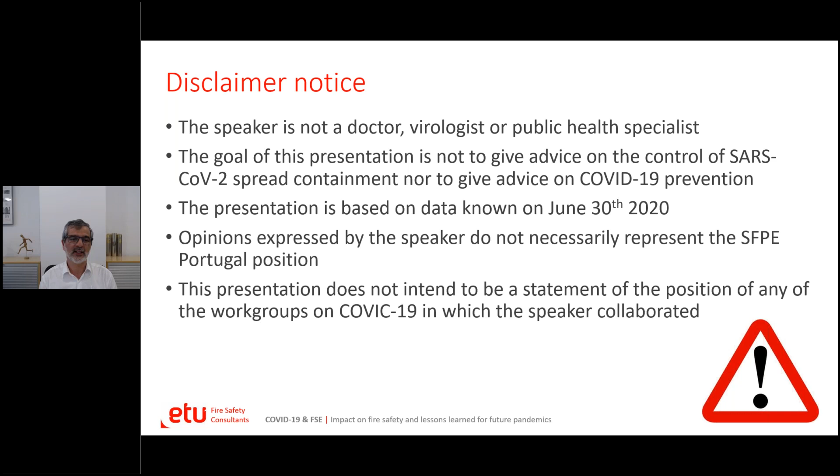So I'm going to start with a very boring disclaimer notice. I am not a doctor, nor virologist or public health specialist. My goal is not to give advice on the control of COVID or prevention of COVID disease. This presentation is based on data collected until 30th of June, so 6 days ago. And the opinions that I express in this presentation are my own. They do not necessarily represent SFPE Portugal's position, nor do I intend to be spokesman of any of the work groups in which I collaborated about COVID-19.

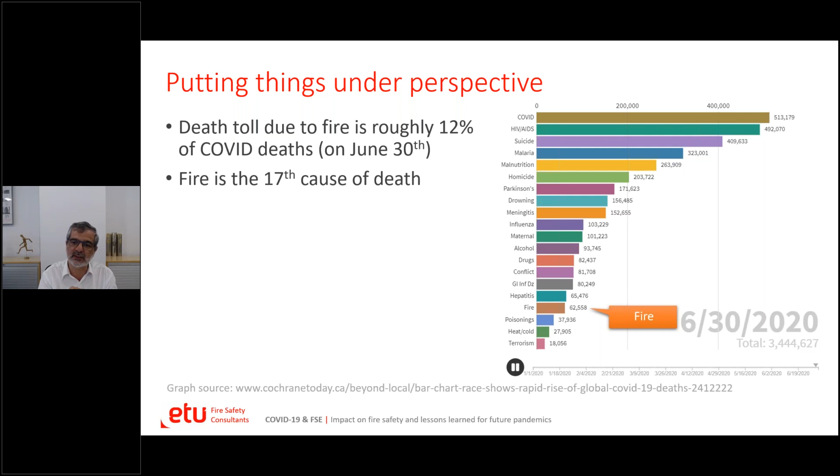So with that being said, I'm going to start trying to put things under perspective and to see how serious fire is comparing to COVID. This is a graph with the number of deaths since the beginning of the year until June 30. And we can see that fire has caused so far 62,000 deaths and COVID more than 500,000. So it means 12% of the deaths comparing with COVID.

But the thing is, eventually this simple comparison could make us neglect fire safety during pandemics, but one must take into account that the only metric to compare something that is bad is not only the death toll, it's also important to take into account other problems like property loss, etc. And anyway, I think that's a goal for all of us. No one wants the number of deaths due to fires to increase during a pandemic; it is just to add another problem to the equation.

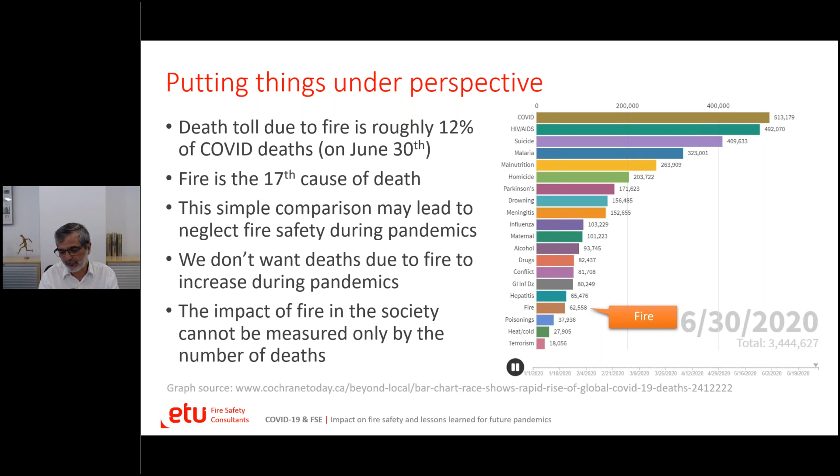I also participated in an SFPE European chapter leadership meeting that we scheduled just to discuss the impact of COVID in Europe and to share our experience from different countries, since we lived this very differently from country to country. So this was also very important for preparing this presentation. And we also had in Portugal a webinar, to be more precise, to discuss the impact of COVID in firefighting. We had a lot of webinars about COVID, but this one seems worth mentioning. And part of what I'm going to present is a result of clients' consultancy and listening to their concerns, and I'm going to show two stories about problems that my clients phoned me about.

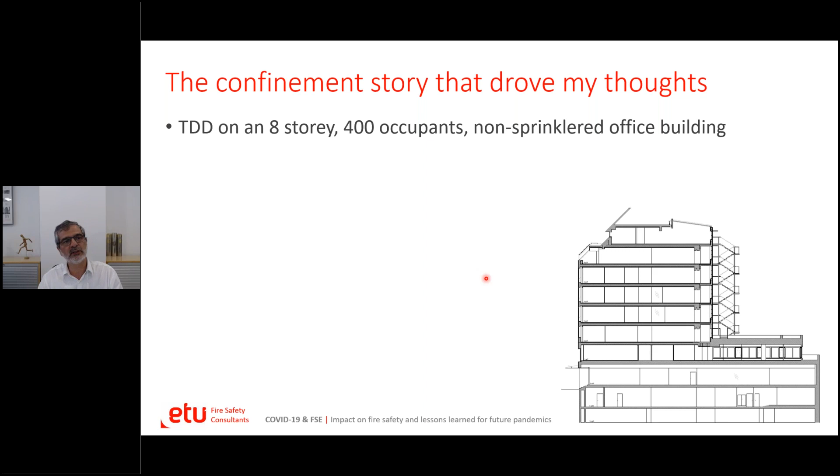The second story is during the confinement. I went to visit a building. You can see here the cross section of this building. I went to make a technical visit for technical due diligence in an 8-story building, 400 occupants, non-sprinkler office building. And at that time, during confinement, there was a very low occupancy load. Just 10% of the employees were there. All others were home working or remote working, as you prefer to say.

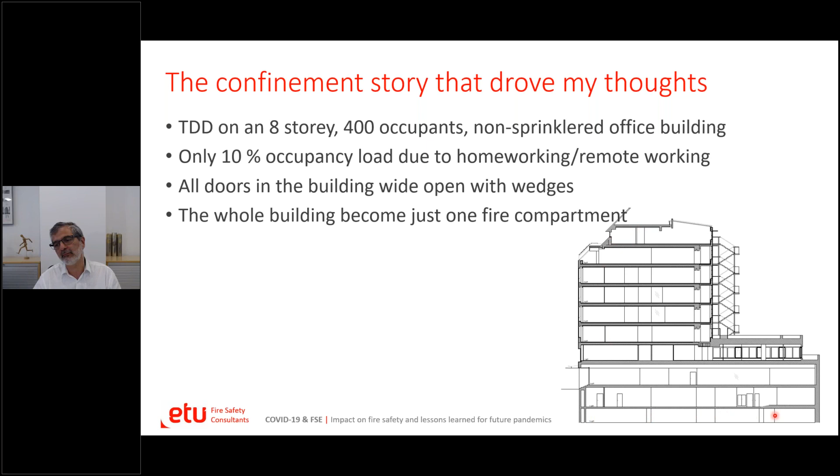But the thing is, all doors in the building from basement to top were wide open with wedges in all doors. So the whole building became just one fire compartment, a huge fire compartment. And if we had a fire in the basement, the smoke would spread to the last floor through the stairwell. So it would use the evacuation route as a channel for smoke, as a chimney.

This open-air outside stair will enter the building and will leave here. So just one fire in the basement could put at risk all people, all occupants in the building, and would block all evacuation routes because all doors had wedges.

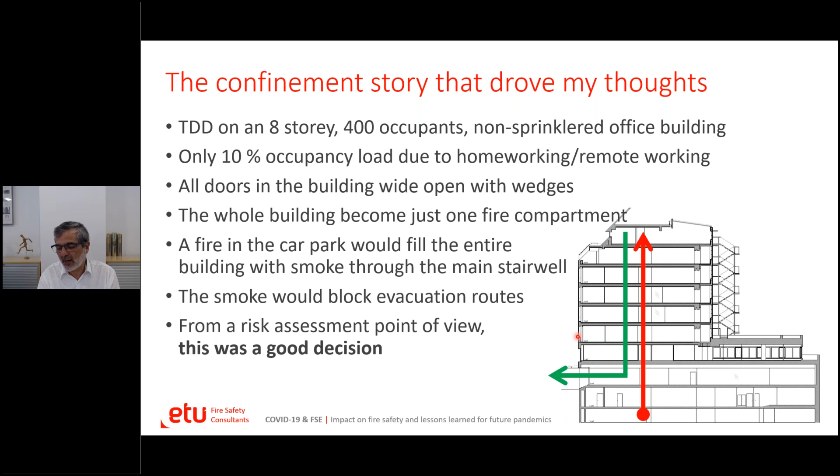But the thing is, and this is very interesting, from a risk assessment point of view, this was a good decision. And why is that? Because when we make a risk assessment, in a very rough definition, risk is, and we all know this, a product of the severity by the probability. And at that time, the probability of dying from COVID in Portugal was 10 times higher than dying due to a fire. And since the death toll is still counting, today the probability of dying of COVID is 40 times higher than dying from a fire.

But on the other hand, if there was a fire in the building, imagine 50% casualties in the building, so 20 people could have died in that fire due to wedges in all doors, which, taking into account that the average number of fire deaths in Portugal is 40 people per year, just one fire could increase the total yearly death toll by 50%.

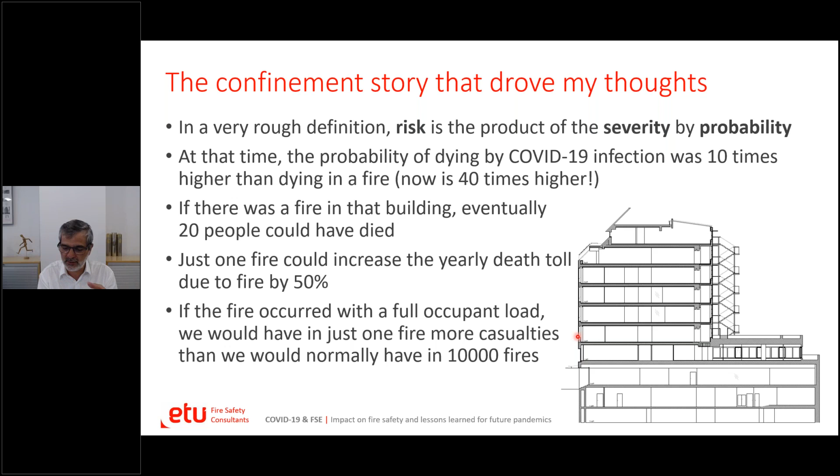And imagine that this fire occurred with full occupancy of the building, and we would expect more than 40 casualties in this situation with all doors wide open with wedges. This would mean that just one fire would have as many deaths as 10,000 fires in Portugal, which is more or less the average number of fires we have in Portugal per year. So this made me think that this is a problem that we must look into very carefully.

And once again, talking a little bit about risk assessment, this is a conceptual definition that I use when I'm lecturing courses about risk assessment. I like to use this definition in my classes. Risk assessment is a way to predict the future by looking into the past. And the trick is we tend to look at the past as something that doesn't change. It's a very common expression: it's impossible to change the past. Everyone has said this at least once.

However, the past is always changing. In fact, one of the definitions of the present is the continuous change of the past. This may seem too philosophical for fire safety engineering, but it's a very important concept. When a black swan like COVID appears, we are forced to speculate about the likelihood of this event repeating in the future. So putting this in more engineering wording, if there is an event with a very high severity, like COVID, we must make the assessment of its probability, as simple as that.

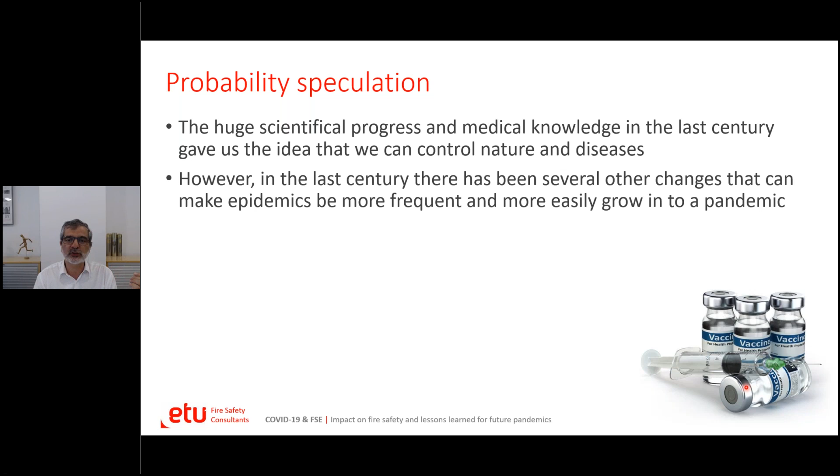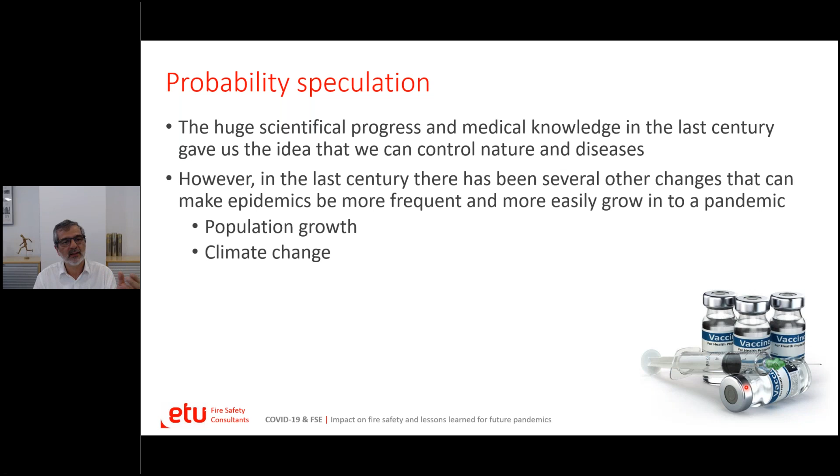But if we look carefully to this last 100 years, we can see that at the same time that we had a lot of progress on medicine and medical care, we also changed so many things in our lives that can facilitate a pandemic that, well, eventually we are not as safe as we thought. So population growth is one of them. I'm going to talk a little bit in more detail of all these topics. Climate change and transport and globalization.

So when we look to the graph of population growth, this is the last 2 centuries, and you can see that in a century we didn't grow that much, but in the last 100 years, from 1920 to 2020, we went from 1.9 to 7.6 billion. So it's a huge increase of population. This means more cities closer to each other, cities with higher population density, so it becomes easier to spread disease. We have megacities with more than 10 million, and they tripled in the last 3 decades. And this creates a sort of population continuum that facilitates the spread of diseases.

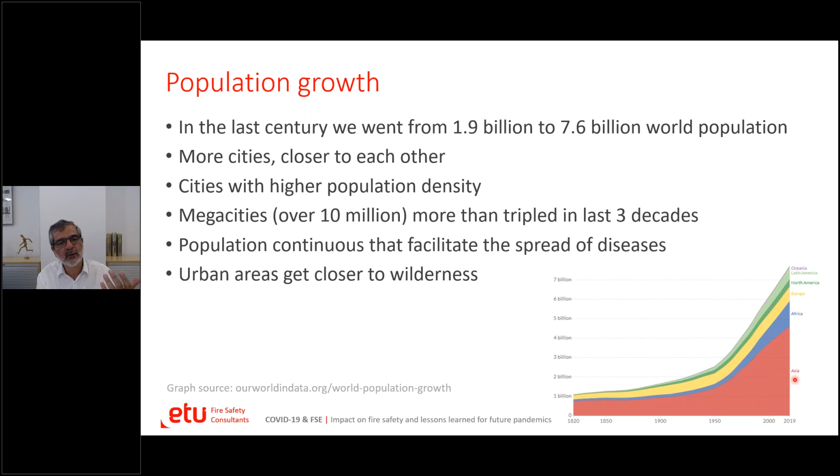And this is interesting to look at as well. There are some regions in the world in which the population growth is much higher. So eventually, from this point of view, we can expect, and if we look to the last pandemics, and I'm going to list them afterwards, they come from the regions in which we had the biggest population growth. And another side effect is that urban areas get closer to the wilderness, so we are more exposed to wildlife.

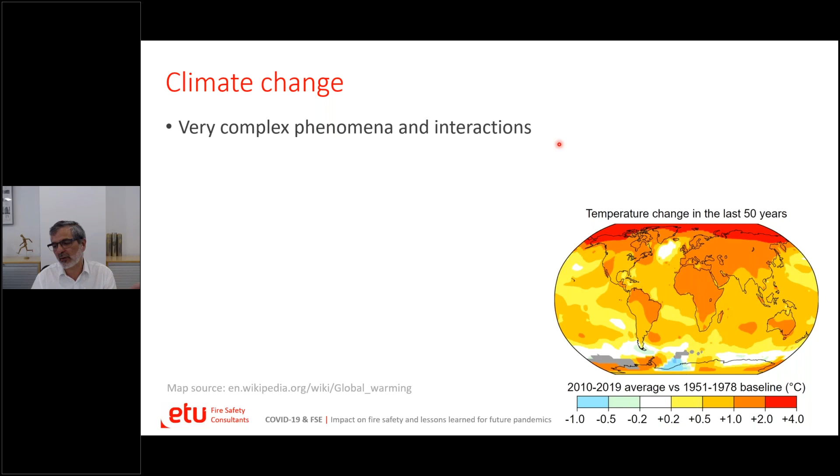Concerning climate change, this map shows the average temperature increase in the last 50 years. So you can see here the increase of temperatures, and most of the world has been affected by this. This is a very complex phenomenon. It has a lot of interaction. I'm going just to name some very simple ones. Shrinking habitats that make wild animals get closer to urban areas in search of food. Lower food resources make humans look into wild animals as an alternative food source, and we see that a lot in Asia.

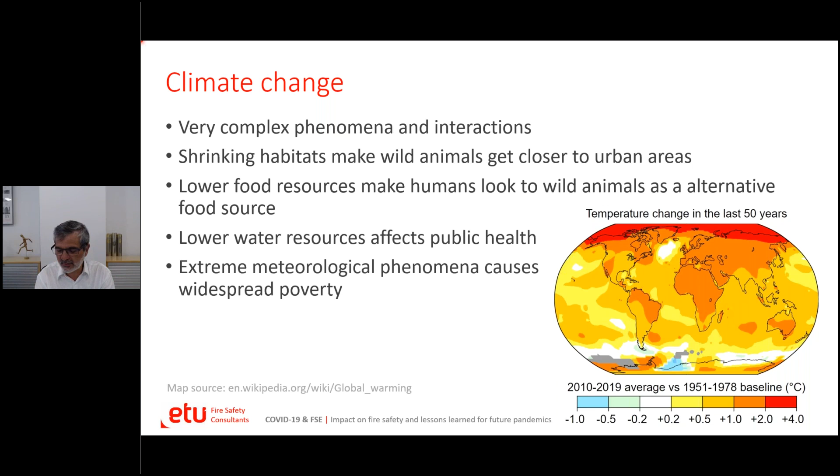Shortened water supply affects public health and the hygiene of people and communities, which facilitates the spread of disease. Also, these extreme meteorological phenomena can cause generalized poverty and very strong wildland fires. So all these effects can facilitate the spread of diseases. And on top of that, we have much better transports, and we have globalization that has very interesting, good economic effects and knowledge effects, but it has a dark side as well.

So nowadays in large cities, public transports are overcrowded, so this can rapidly scale a small cluster infection to a community transmission. Modern transports like cars, trains, etc., make it easier to travel from town to town or to different neighboring countries. So we can scale up very easily community transmission to epidemic level, and cheaper flights and more frequent flights can scale up the epidemic into a pandemic. And then we have the perfect storm like COVID.

So all this put together, this was what we had like a century ago: difficult animal-human transmission. Wild animals were apart from humans. Transmission between communities was very low, the transports were slow, so it could take days to go from one city to the other, so people would die before reaching the other city. Lower transmission inside the community because you had lower density cities, so people were not so exposed to each other.

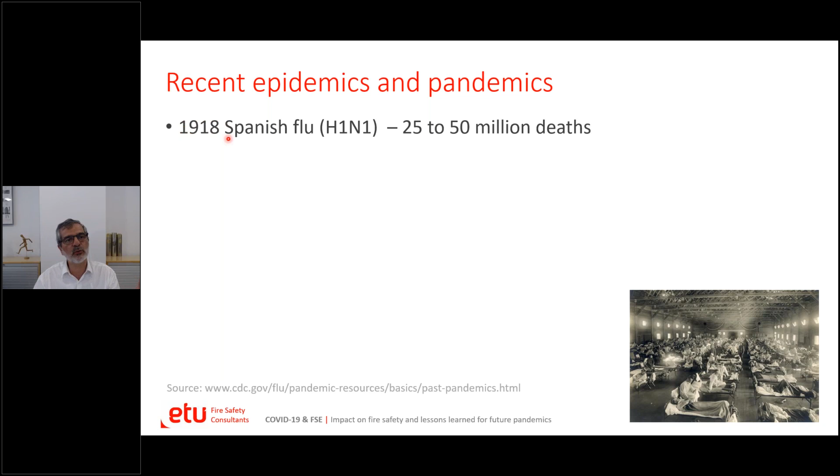So Spanish flu caused a lot of deaths. Well, this is a rough estimate, 50 million, but you must take into account that this was before antibiotics were discovered, and this was just after the First World War, so it was a very good environment for such a death toll. But then we had Asian flu, more than 1 million deaths, Hong Kong flu, 1 million deaths. So this was the past century, 20th century, and in the 21st, the SARS-CoV epidemic, that was pretty much localized, so just 8,000 deaths.

Then we have the H1N1 pandemic, 500,000 deaths. Well, this is the estimate of CDC; there are higher numbers than this estimate. So then we had the MERS pandemic, or epidemic, to be more precise. The gray ones are epidemics, the black ones are pandemics, okay? And then we have COVID, more than 500,000 and still counting.

So we had in just 20 years 4 pandemics or epidemics. This is not one for every 5 years because the first one was in the early years of the 21st century. But you can see that there are, on average, 7 years between each of these pandemics or epidemics.

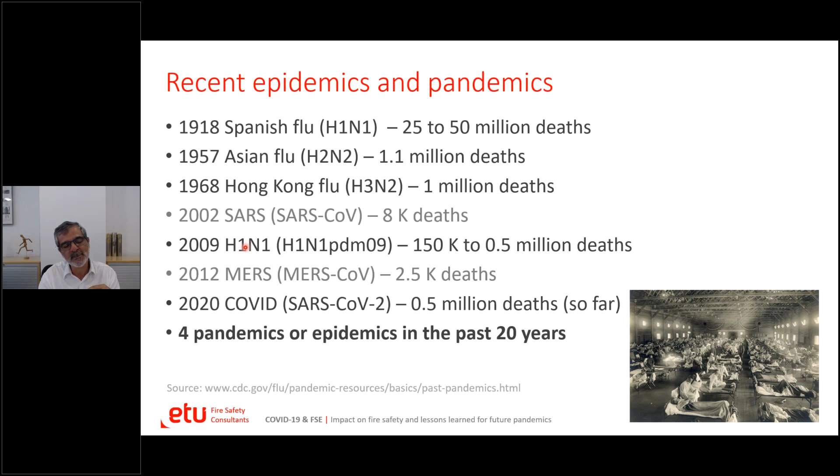And we also must, when we analyze this situation, understand how viruses spread. There is direct contact with body fluids, like hepatitis or AIDS; indirect contact, small droplets on objects or furniture that we touch and then take to the eyes, nose or mouth; and direct contact with airborne virus particles that are in the air.

So the containment measures will vary depending on the type of contagion. For direct contact with body fluids: self-awareness, change of habits, protection devices like condoms. For indirect contacts, we have hand hygiene, surface disinfection, respiratory masks, just to avoid touching the nose and the mouth.

But when we have an airborne virus, then we have to have the full package. We must have social distancing, respiratory masks, home working, lockdowns that may impact movement of people and transports. We have confinement. So the impact on fire safety will also vary a lot depending on these measures.

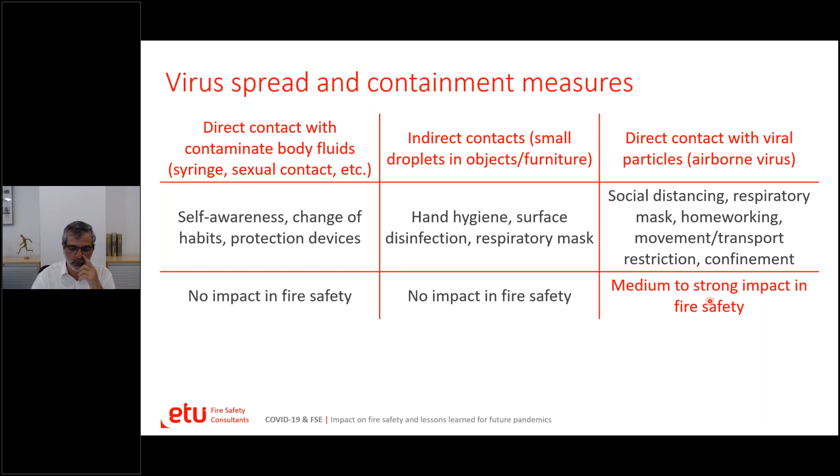So I would say in the first two cases, there is no impact on fire safety. But in a pandemic like COVID, we have a medium to strong impact, and I'm going to talk about it in the next slides. I tried to summarize and put in different boxes all types of consequences that I came up with. We have temporary changes in the built environment, changes in our way of living, like social distancing and home working, maintenance restrictions, firefighting restrictions, and I'm going to look at all of them.

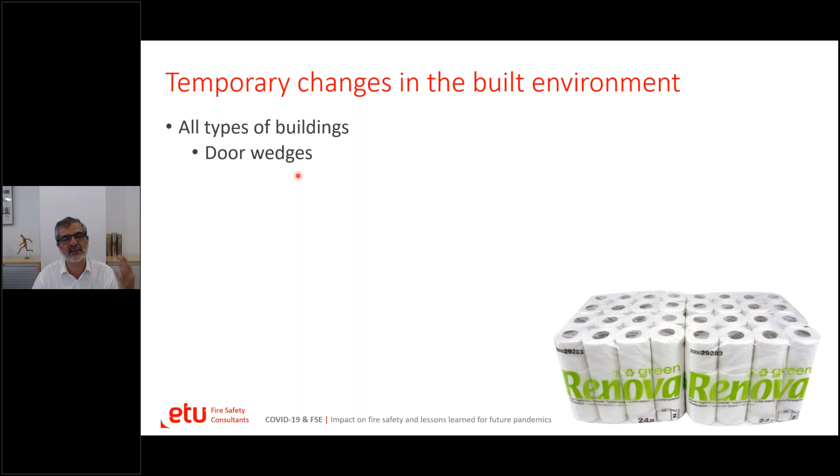Within the changes in the built environment, there are several types. Some apply to all types of buildings: door wedges, fire load increase. This is an example of fire load increase, an image we all have from the media at the beginning of COVID, the rush for toilet paper.

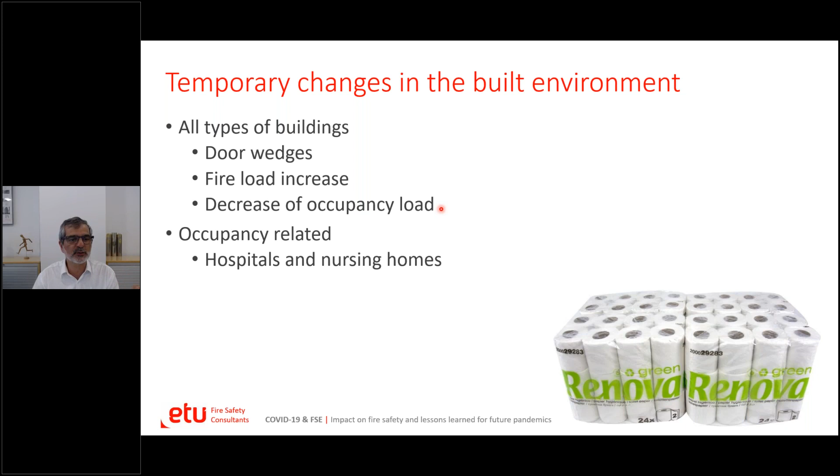But we also have a decrease in occupancy load in most buildings, which can be considered good in an ASET/RSET analysis. We also have some occupancy-related ones, and I'm listing just the more relevant: hospitals and nursing homes, commercial buildings, industrial buildings. The most obvious problem with door wedges is fire compartmentation if it is a fire-rated door, and I already mentioned this in the example I gave in the beginning.

But this is not the only problem. It also jeopardizes smoke control effectiveness, not only in stairwells and pressurization systems, but also in large areas with external doors if you hold them open. And this can jeopardize the effectiveness of pressurization smoke control systems.

And of course, there is also an advantage to having wedges on doors. It makes evacuation faster because it doesn't require door negotiation. But, as I'm going to talk about in the next slides, this doesn't really have a strong positive impact on total evacuation time.

We have problems related to fire load increase. The most obvious one is alcohol-based hand sanitizer. It is very easy to ignite. Most countries have specific code requirements that vary according to the quantities. And what I have observed is that some types of buildings, for instance schools, would have to store 200 liters to face the demand.

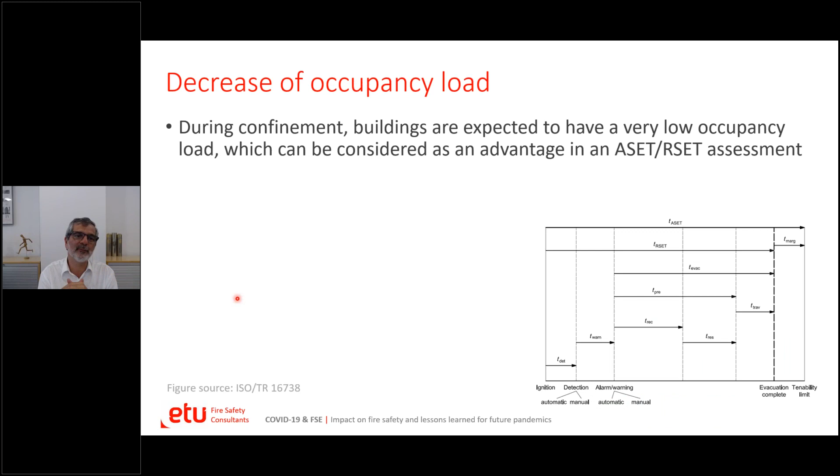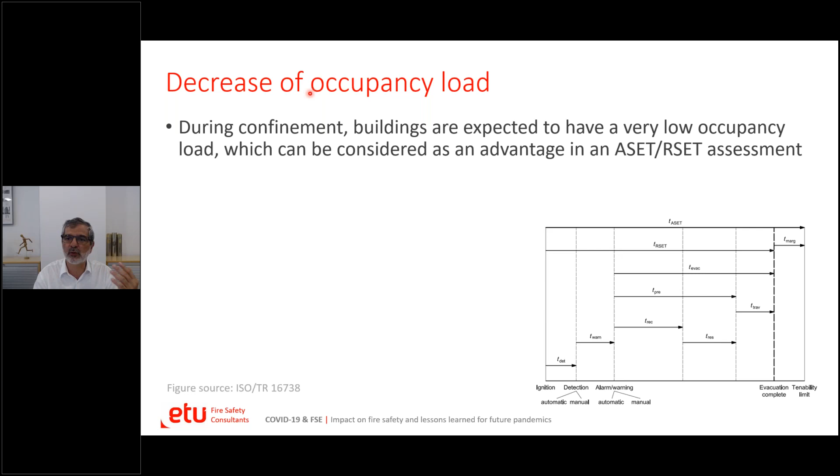Concerning the decrease of the occupancy loads, during the confinement we have lower occupancy load, obviously. Eventually this is good from the ASET/RSET assessment. But we must take into account that this only affects the travel time. It doesn't have an impact on response time, recognition time, time to warning, and detection time.

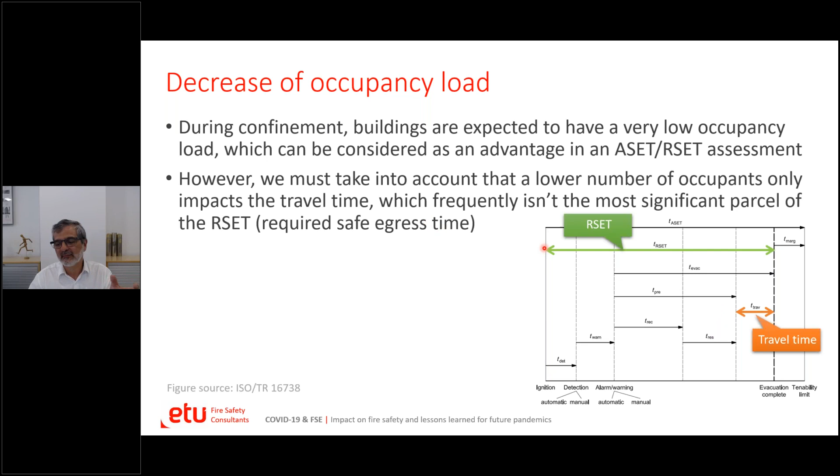So this is just a small part of the total RSET. And eventually reaction time, the pre-movement, is the biggest one. So these impacts won't be as good as we would like them to be.

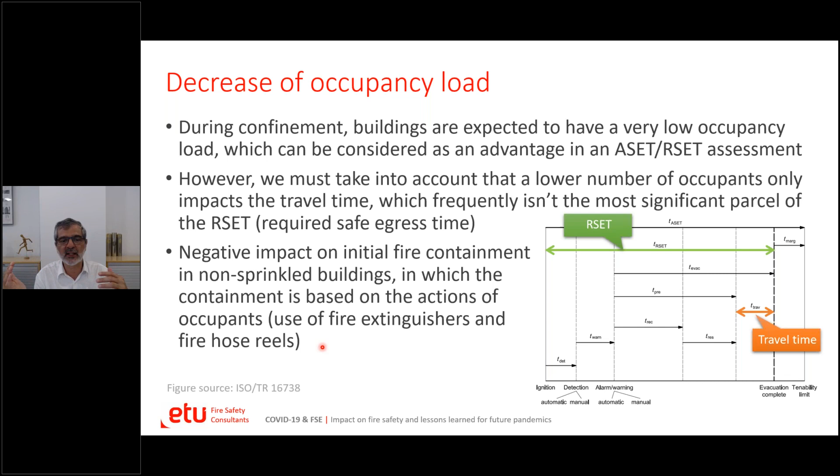On the other hand, there is a negative impact as well, because in non-sprinkler buildings, we have less people to fight fires in the initial phase to use a portable fire extinguisher or fire hose reel. So a small fire can very easily scale up to a very large fire because we don't have anyone in the building to face the fire. So this is also a problem.

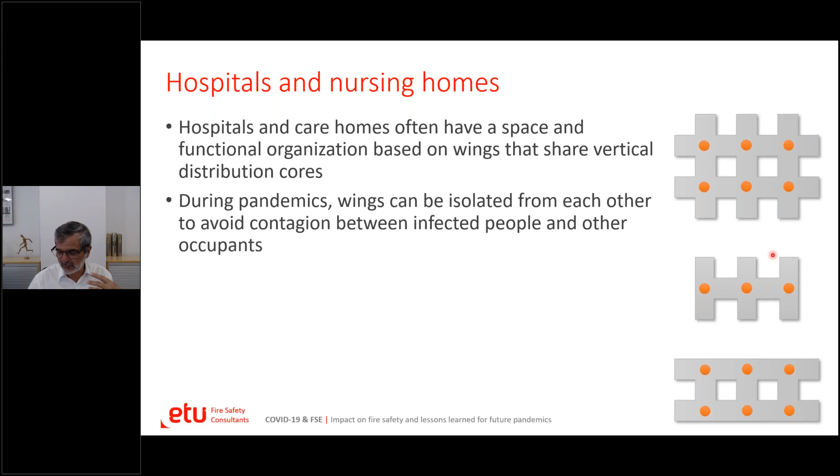and this was specially designed not only for functional, ventilation and lighting problems, but also, in case of an infection, so we could separate one wing from the rest of the building and isolate infected people from non-infected. So we can split buildings in two, like I show here with these red lines. And we can adjust these barriers over time according to the needs. So if we have more infected people, we can change from the first position to the second, to the third, and so scale the space to follow the demands.

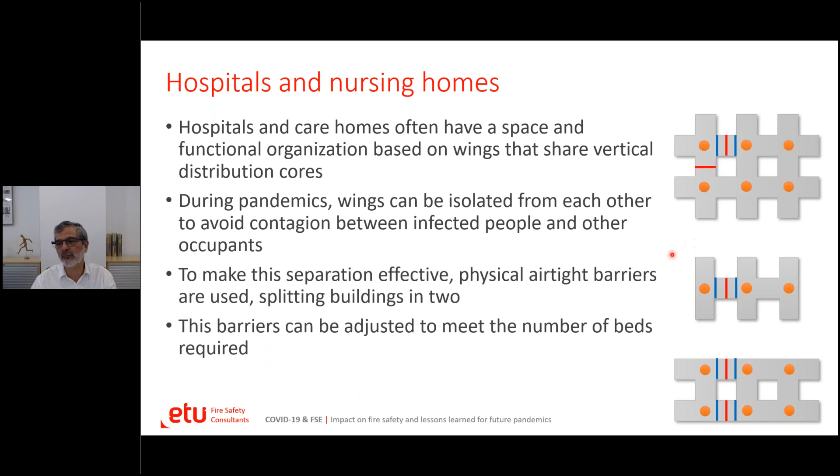And the thing is, travel distance may be exceeded, and in this particular case, it is. If it was in the middle, maybe I could be code compliant if the one-way travel distance is just half of two-way, which doesn't happen in all countries in Europe. But in this situation, in Portugal, we wouldn't be complying with code. So you can exceed travel distance. Horizontal evacuation strategy may become impossible because you have this barrier. Anyway, normally we don't do horizontal evacuation with infected people.

And we also have problems with smoke control. A very common solution in Europe for smoke control in a corridor is to have alternate makeup air grills and smoke exhaust grills. So in a very long corridor, I would expect to have two makeup, two smoke exhaust, eventually three of each. With this barrier here, I have just one makeup air here and no smoke exhaust. So if I have the fire here, this would be truly problematic. And this side of the corridor is not as bad, but it's not properly balanced because you have much more smoke exhaust than makeup air.

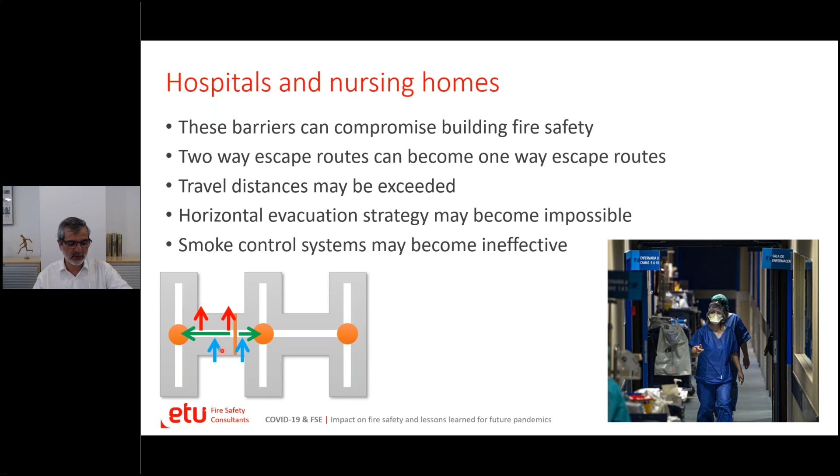But imagine that you move this barrier to this position, then you would have on this side just smoke exhaust, not that bad, but on this side you would have double makeup air for the smoke exhaust, which would put the corridors in overpressure that could spread the smoke into the rooms where the patients are. So this is truly a problem that we must look at very carefully.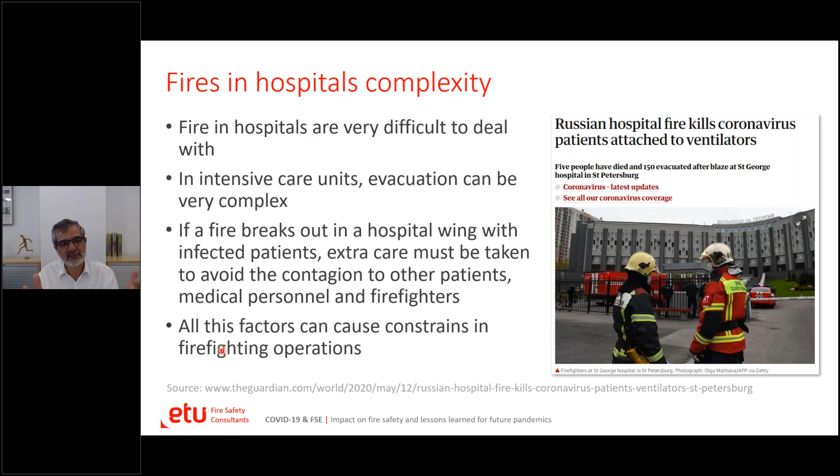And anyway, fires in hospitals are always very difficult to deal with for several reasons. And in intensive care units, which is what we are talking about with COVID, evacuation can be very complex because we don't want to evacuate infected patients to other areas of the building, and we need extra care to avoid contagion of personnel and firefighters. So all these factors can cause great constraints in a fire in a hospital.

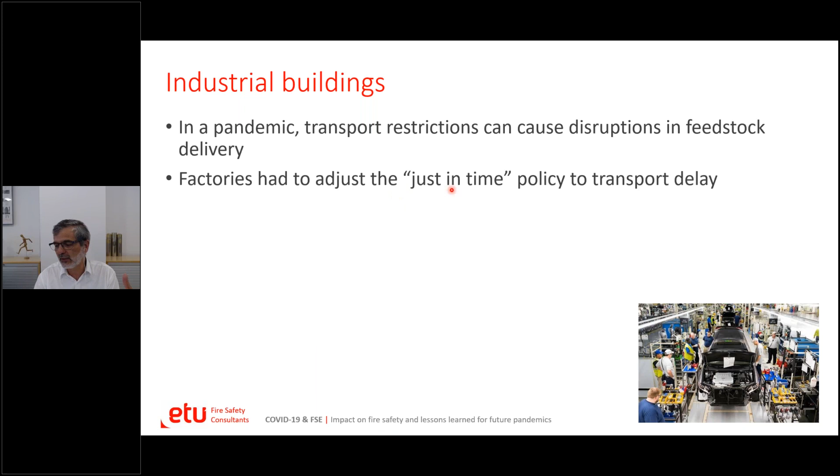And jumping to industrial buildings: in a pandemic, transport restrictions, and this is something that I observed in Portugal, caused disruption in feedstock delivery. So factories had to adjust the just-in-time policy to deal with these delays in transport. A very standard just-in-time storage is 3-week storage. And in some cases, factories had to increase the stock to 4-month stock.

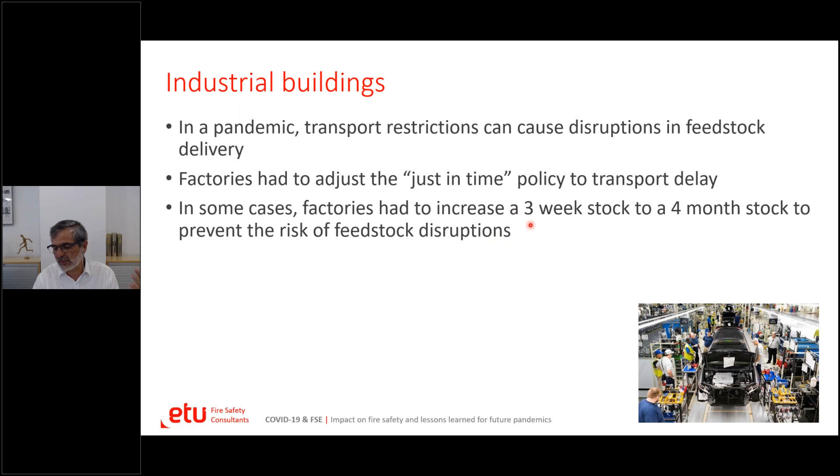Mostly companies whose feedstock came from affected regions of the world, like China and Iran, for instance. So they had to increase the stock in the factory a lot. And of course, they weren't able to make complex improvements in fire protection of the buildings in which they operate. So the buildings were not prepared concerning sprinkler dimensioning and smoke control dimensioning. Buildings were not prepared for that higher fire load.

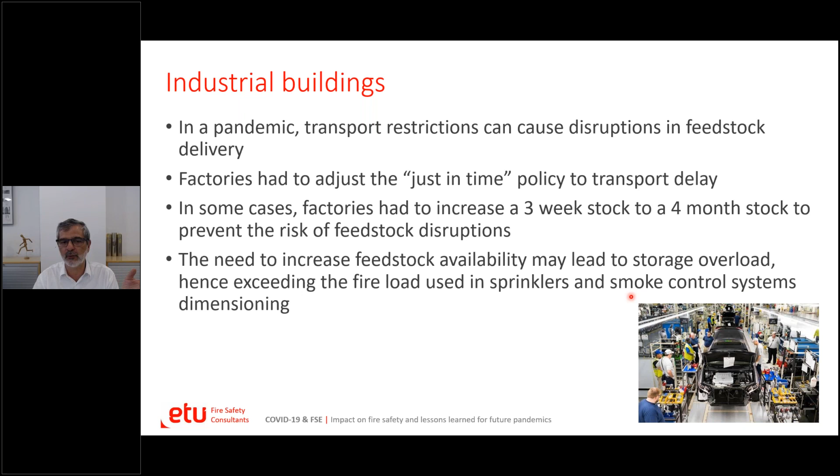Another thing that I wanted to look at was how home working could impact fire safety, because if you have lockdown, people will work remotely. And these are common numbers, I would say, in all countries. In Portugal, 72% of fires are residential fires, and 86% of deaths occur in residential fires. This is the average from 2014 to 2019.

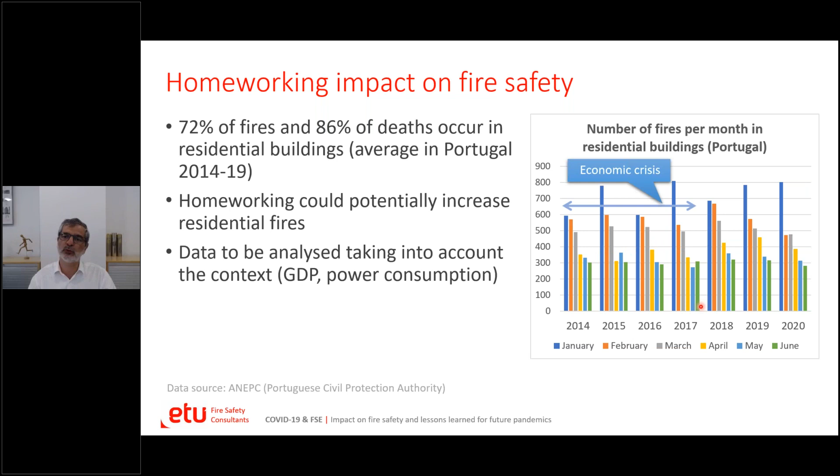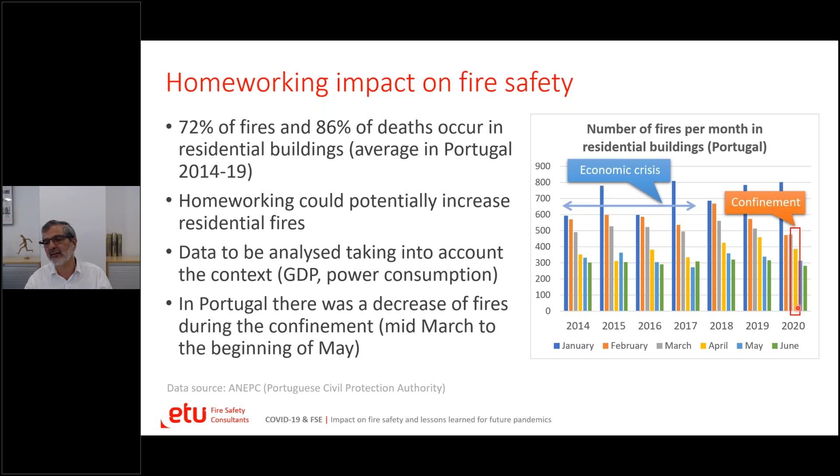And when we compare the gross domestic product to power consumption to number of fires a year, you can see that they follow each other. So I decided to make the comparison only with 2018, the first post-crisis year, and 2019. And this red line represents the confinement period in Portugal, from mid-March to the beginning of May. And this is very interesting. We see a decrease of fires during the confinement. This is not very intuitive, but it was not only in Portugal that this happened.

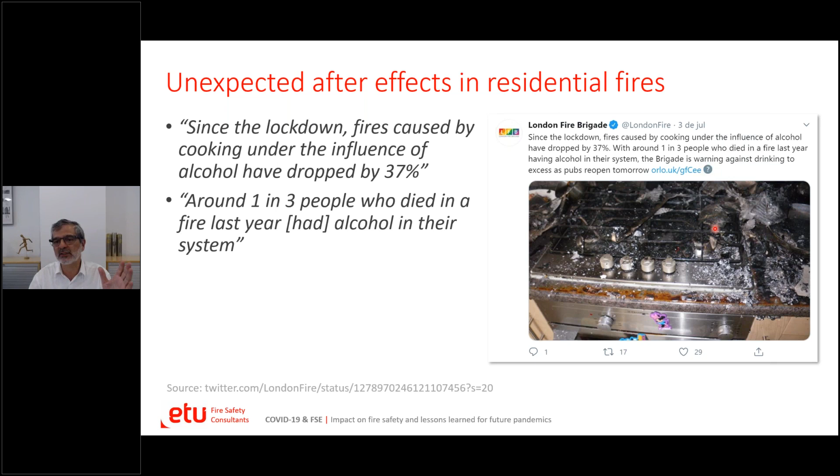For instance, this is a very recent tweet from the London Fire Brigade saying that since lockdown, fires caused by cooking under the influence of alcohol dropped by 37%. And around 1 in 3 people who died in fire last year had alcohol in their system. They opened the pubs yesterday, and the concern was that with opening pubs they would have more fires in residential buildings.

So, almost finishing, and I'm sorry that I'm going to finish with 2 or 3 minutes delay. Anyway, we will have time for Q&A.

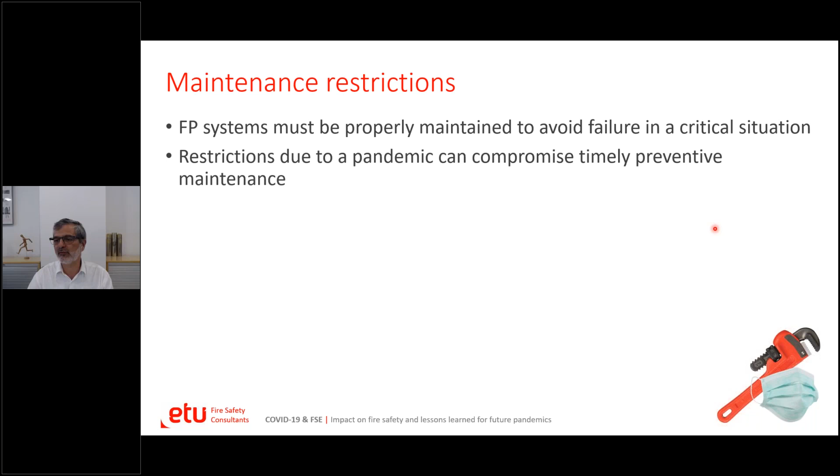Maintenance restrictions: SFPE Global made a lot of webinars and discussions on this. Fire protection systems must be properly maintained to avoid failure. And there are some restrictions due to the pandemic that can compromise timely preventive maintenance, not only due to lockdown and movement restrictions, but eventually you may not have the spare parts that are needed for some maintenance operation, for instance.

But I would say that it is not expected that governments will want long confinement periods, because this is terrible for the economy. So they will prefer, as they are doing now in Europe, self-protection equipment and social distancing, to avoid lockdowns. So I would say if a system is properly maintained, a 2 or 3 months delay in preventive maintenance is not critical in a pandemic situation.

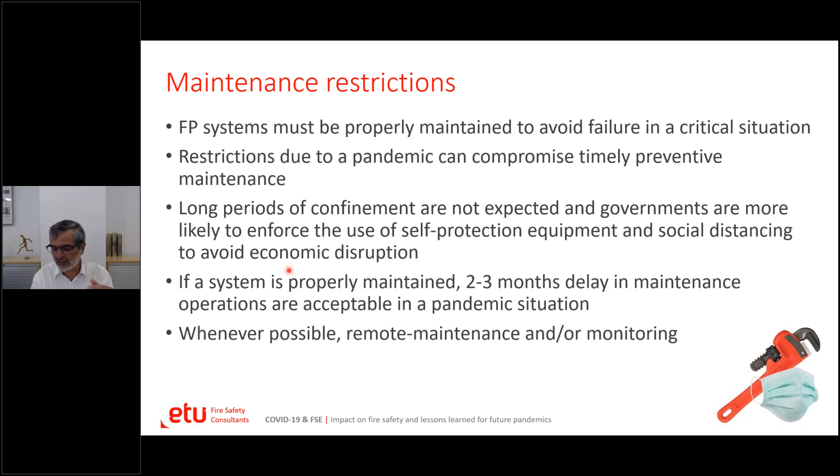Anyway, whenever possible, I advise using remote maintenance equipment. That is not possible, of course, for a sprinkler installation, but it can be possible for a smoke detection system, for instance. And also, occupants can be instructed to carry out some basic visual inspections.

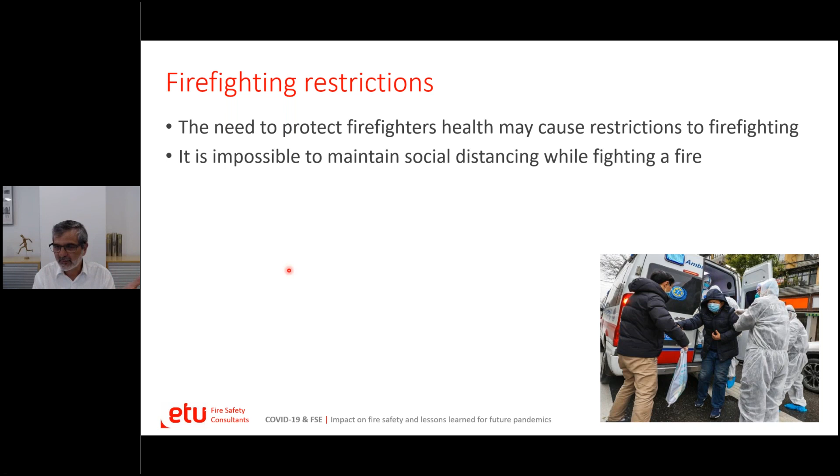Firefighting restrictions: as I mentioned before, we must protect firefighters, but it's impossible to maintain social distancing in a fire scenario. So there was the need to divide firefighters into separate teams that never come across each other at any moment in the headquarters. So this allows less freedom in shifts and rest scheduling.

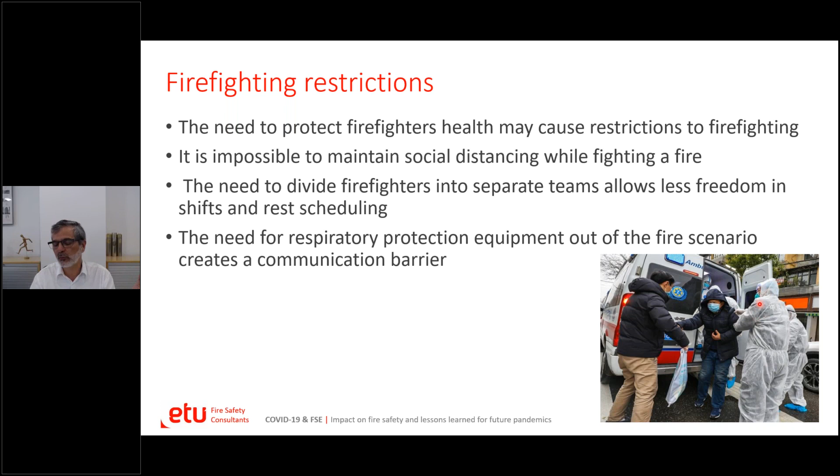Also, the need for respiratory protection masks creates a communication barrier with civilians. There are logistical restrictions in longer fire operations. That doesn't happen a lot in structure fires, but it can happen in forest fires that last for 2 days, 3 days, 4 days. So they have to eat in the theater of operations, but they have to maintain social distance. Same thing, they have to sleep in separate rooms. So this can create a lot of logistic constraints.

And most of all, last but not least, very important, firefighters need to respond to several COVID-related emergencies. So this compromises a lot the readiness to attend a fire. So wrapping this up, pandemics with the magnitude of COVID are likely to occur in the near future, I would say. We may expect during a pandemic a reduction of fire events due to the impact of confinement and economic crisis. A lot of containment measures to contain virus transmission can impact the severity of fires.

Home working, remote working doesn't seem to have an impact on the number of fires, but I would say this needs to be studied more deeply in future months. And it is unlikely that social distance will shorten or increase the travel time in a real fire scenario. Lower occupancy load won't significantly reduce total evacuation time. And this is my last slide.